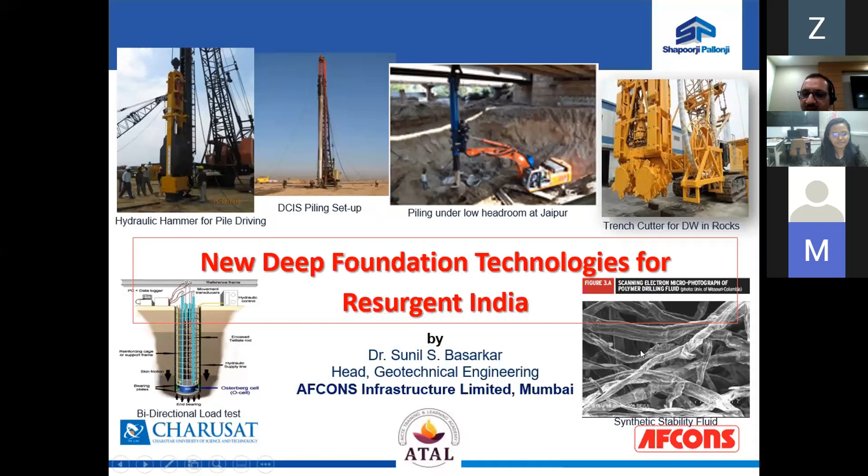My content will go through driven piles with a case study at Dahej, driven cast-in-situ piles with a case study at Mundra. Then what are the recent technologies which have entered the Indian market, and what are the technologies required for making India a vibrant infrastructural hub across the globe. What are the load tests that can address the fast-growing needs of Indian deep foundation industry? Then we conducted an initiative at Hissar, which was about a continuous flight auger pile. This we had taken up just to understand the need for faster piling requirements. I'll take this up, followed by my concluding remarks.

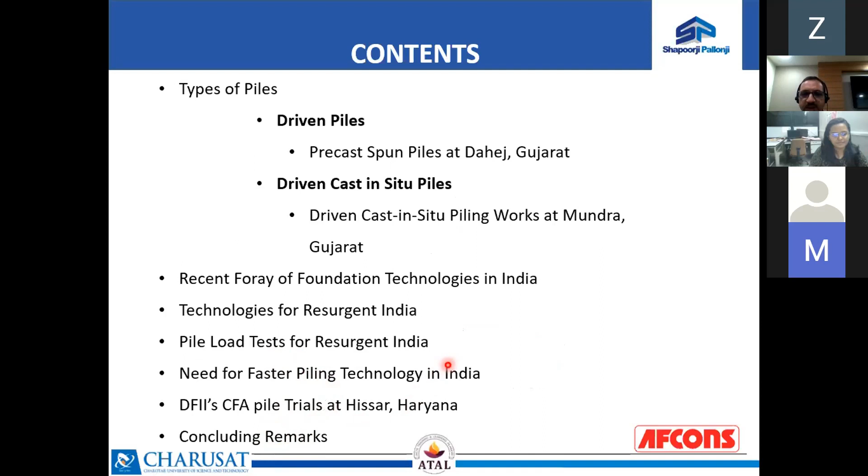If you are aware, there are bored cast-in-situ type piles which are used to take up heavy load. Is my voice audible to all? Am I audible to all? Yes sir, you are clearly audible. Thank you very much.

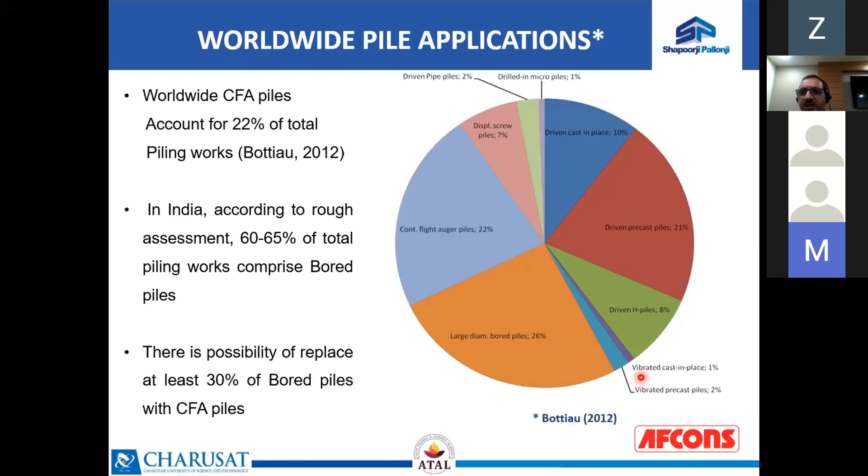I take it to the driven pile, which may be driven by a hammer or vibration or by jetting, water jetting. Driven piles may be driven precast piles, and the actual element may be hollow. It may be tubular, in the form of spun piles, or it may be a steel pipe type of pile, or it may be solid. If solid, it can be circular, rectangular or hexagonal concrete piles. It can be rolled steel members, or even timber piles can also be used.

Timber piles are more popular abroad than in India, because in India we cannot afford the wood as it is a scarce material. There is also driven cast in situ pile, which means you drive it as well as cast it in situ, which is invariably of concrete variety. We'll see what this type of pile is.

This is driven precast piles, in which the RCC element is driven by a hammer or other convenient means. Here you have a pre-stressed concrete pile, a thick-walled pile, but hollow in nature. To drive these piles, we require a type of hammer. It can be any type - hydraulic hammer, pneumatic impact hammer, single-acting or double-acting hammer.

Here you can see a solid RCC circular pile being cast, and then here it is being cured. Because transport of piles is not always very easy, we have segments about 12 to 15 meters long, so that trailers can accommodate and transport these piles conveniently. That makes it mandatory that if you have a pile greater than 12 to 15 meters, they will have to be jointed together. So jointing of segments - the bottom driven segment and the top segment to be driven - is done in situ. It's called a splicing arrangement.

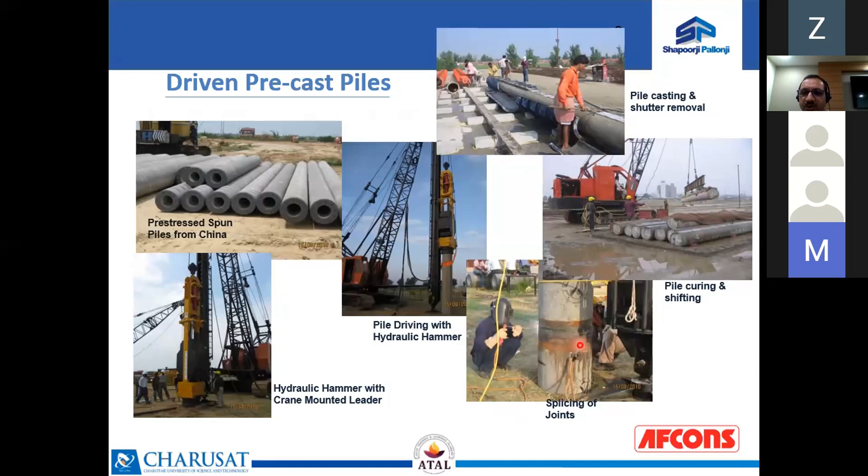So the driven piles, they actually come in lengths, so wastages are very much possible, but being of good quality, the control of quality of concrete is very nice. As I said, at 12 to 15 meter lengths, they will have to be jointed together. Typical section is about 400 to 500 mm in diameter or diagonal. Even 600 mm diameter piles have been possible to drive. Abroad, in Thailand, Malaysia, or Indonesia, if it's soft soil, even 1,000 mm diameter has also been used for driving. So the longer the pile, the more you require a jointed panel.

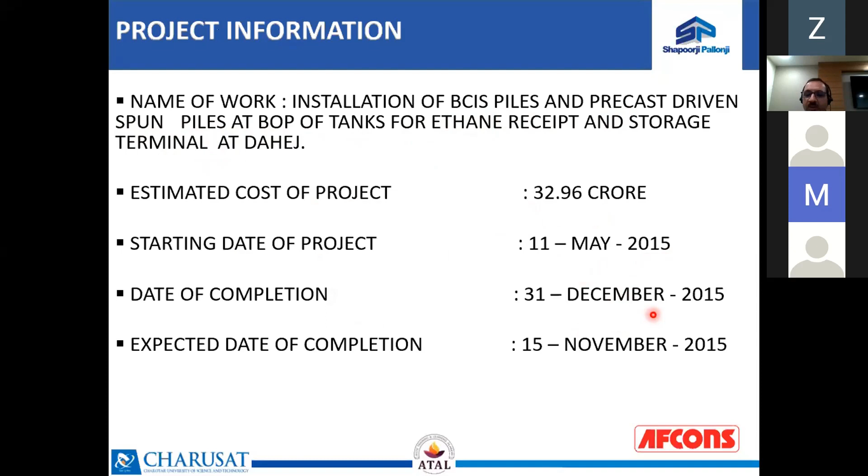With this, I take you to one of the interesting case studies at Dahej, Gujarat, where we had driven the spun precast piles. This was during my tenure at ITD Cementation, an infrastructural company based in Mumbai. This project comprised installation of bored cast in situ piles as well as precast driven piles, spun in nature, for an ethane receipt and storage terminal at Dahej. This was about a 33 crore project which started in May 2015 and was completed in just about 7 months in the same year.

So driven precast pile...

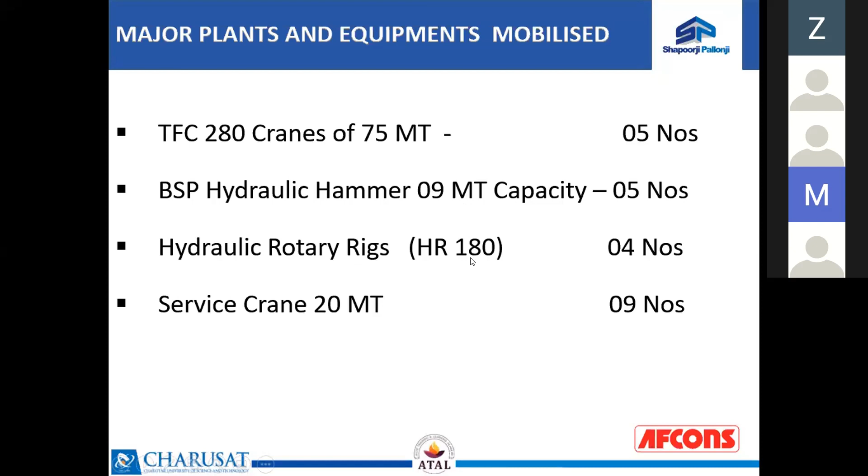So over here, the precast piles have a lot of advantages: rapid speed, a lot of piles can be done in a single day, the quality of such piles is excellent, there's good control, and it is environmentally friendly because the site location is very clean and housekeeping is absolutely perfect in those areas.

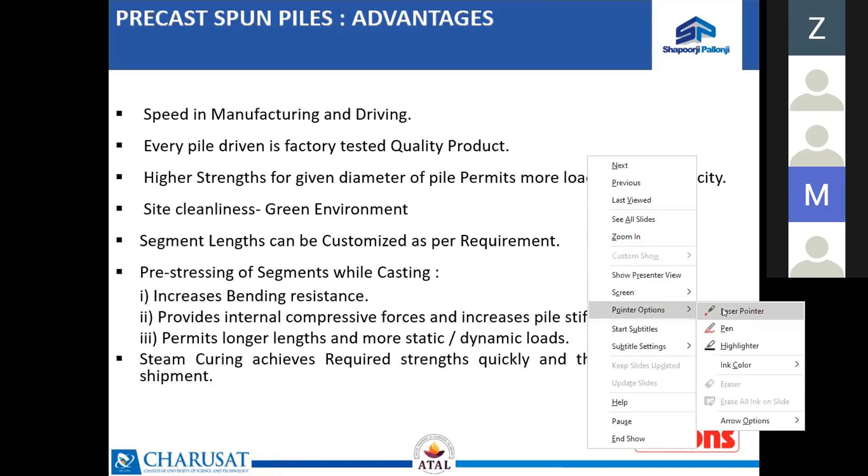If pre-stressed segments are used, it increases the bending resistance. That is the advantage of having a pre-stressed spun pile, meaning for a given area, this pile permits more load to be taken up. So for the same cross section or material, it has more pile capacity, making it all the more economical to use. It provides internal compressive forces and increase in pile stiffness compared to its counterpart, the bored pile. So we can have a longer length of pile and it takes larger load.

There is a possibility that we can steam cure such spun piles, and it can be done in the factory and transported to the sites by trailer. In India, there are about 2 to 3 such manufacturing units available that can manufacture the spun piles in their factory and transport to the site locations.

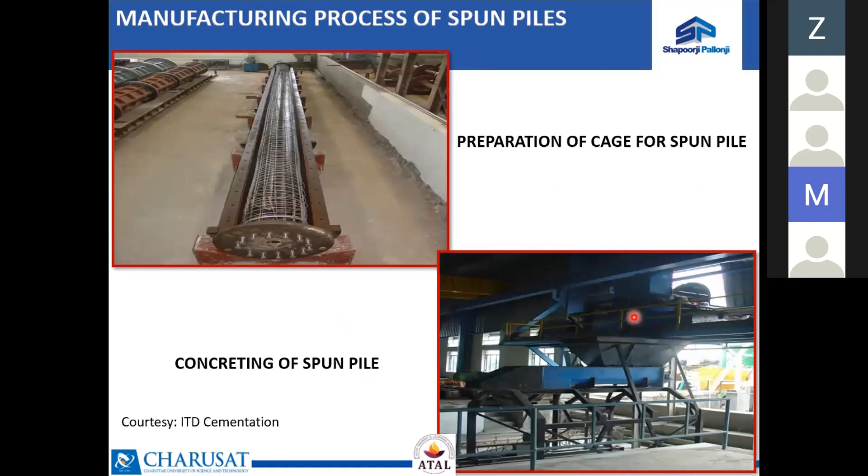Over here, this is the cast containing the spun pile rebar cage. There is jacking at both ends, and this arrangement allows the concrete to be passed from the RMC and poured into this mold by a hopper arrangement. On one side, we have a jacking arrangement so that pre-stressing can be done for the segments. To ensure the concrete is uniform all throughout, we rotate this mold in a spinning action, imparting continuous RPM to ensure concrete is applied and the reinforcement is surrounded by concrete all throughout.

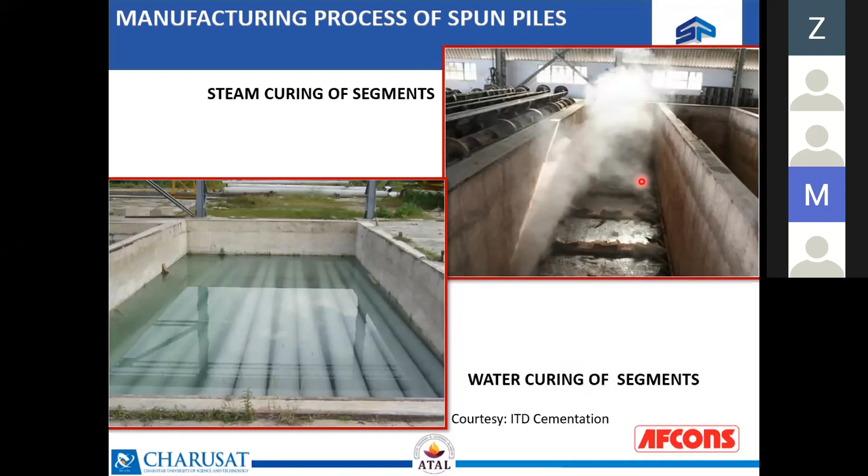Curing of the segments can be either by steam curing in the form of autoclaves, or it can be done in water curing tanks. Both are combined together because steam curing has limited capacity, and establishment for steam curing requires a large number of space and investment. So parallelly, some segments can also be water cured for about 28 days. Steam curing, for your information, is very fast curing, and within 7 days we are able to get the desired compressive strength of the concrete.

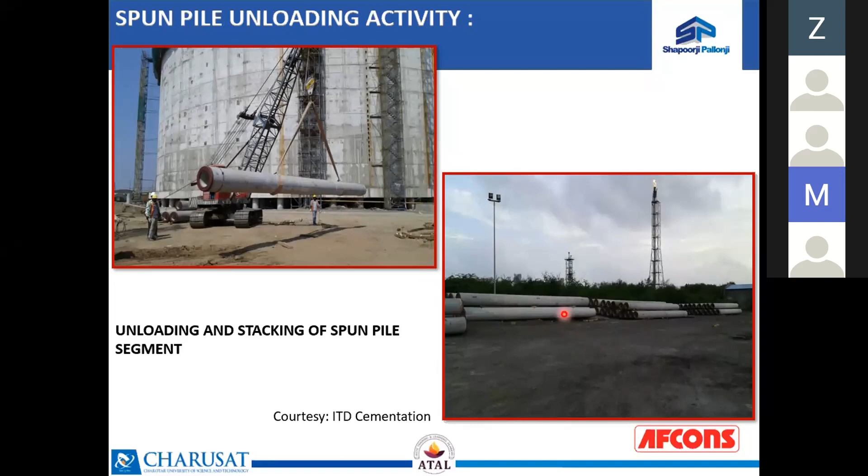This is our activity we carried out at the site at Dahej. You can see the spun concrete pile being lifted up. This is a 12-meter segment being lifted up, and then it is stacked together at one of the designated spots at the site. It is then lifted up, aligned, and pitched at the designated location.

So over here, we had carried out one CAPWAP analysis to study the drivability analysis, just to see what the capacity of the pile is immediately after driving. Then the same pile was subjected to the same test, the drivability analysis, after about 14 days or so, just to check the improvement in pile capacity.

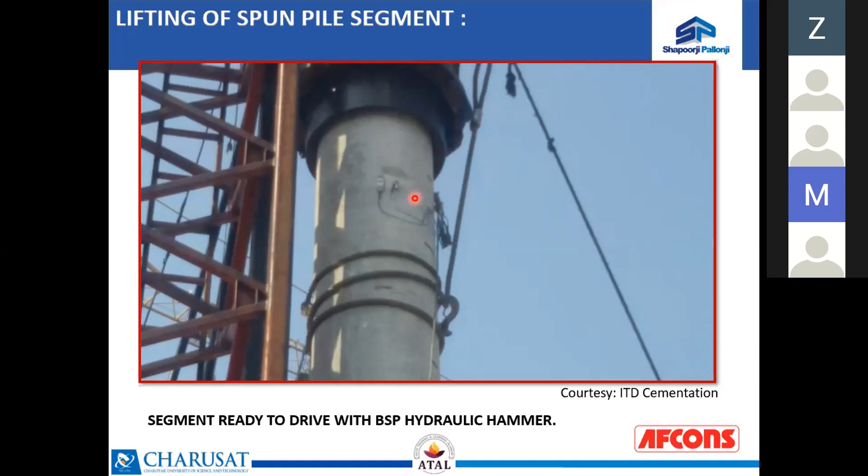So over here, this is a pile that is being driven, and you can see the pile length being driven, and slowly the height of the pile above the ground is reducing. So these are some of the setup you can see associated with pile driving.

Namely, you will see you have a hammer. We had deployed, as I said, an 8-ton metric ton hydraulic hammer, pitched across the top of these precast piles. Over here, you can see a pile helmet, and there is also a wooden dolly fitted inside the pile helmet, so that shocks or damages to the pile head will be avoided.

Since it was a 24-meter pile, there were 2 segments involved of 12 meters each. They were welded on the spot, and typical time required for welding the 2 segments in situ is about 45 minutes. There was a first round of welding about 3.15 mm thick, and finally 3 rounds of welding which were about 4 mm thick together.

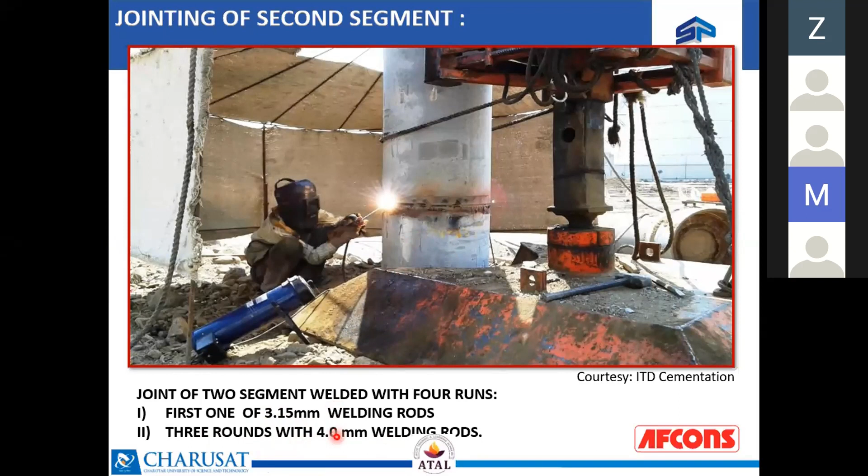So this is a completely driven pile and instrumented now so that we can perform the CAPWAP analysis. This is the test which is immediately after the driving of the pile, and it gives us the resistances in the side shear and the end bearing resistance, so that the static pile capacity of the pile can be determined. Finally, we can also establish the termination criteria and what the increase in pile capacity due to the setup criteria can be.

In this site, you can see that over 2,000 piles were driven, and the pile setup, meaning the capacity immediately after driving versus the capacity after 15 days, was more than 3. That means if we have about 100-ton capacity today immediately after driving, the capacity at the end of 15 to 20 days could be as high as 300 ton. That's the advantage of having a driven pile, which means capacity increases with time.

So this is a typical arrangement. We had a 4-pile group with a cap. You can see how we can extend these bars. What we do is provide a plate at a development length inside the spun pile, and on the plate we keep these extension bars.

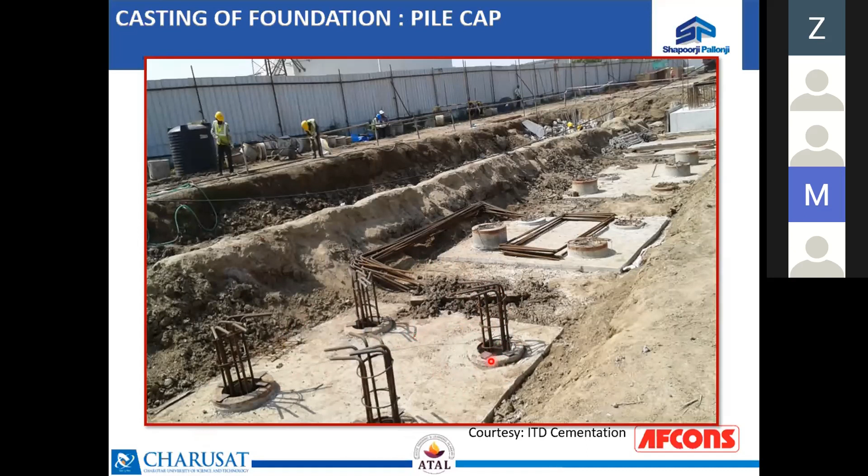These are the bars that will go into the pile cap. That way we ensure that the load from the superstructure will be transferred to the pile cap, and then it will be taken up by the spun piles. So this is an interesting mechanism that ensures the loads are transferred to the spun piles.

There is another variety of pile called driven cast-in-situ piles, where there is a steel casing with a bottom shoe, and this casing is driven by hammers. Imagine a closed bottom pipe driven by the hammer, and once it is fully driven, the hollow portion is fitted with the cage, and the hollow portion is now concreted.

Then this casing is now withdrawn. Casing is a costly material, about 2 lakhs each. So it is important that we extract the casing fully, and the pile will now be in position to be in contact with the soil around, giving it very high side shear resistance and end bearing.

So this is a typical arrangement we have for driven cast-in-situ piles: closed end tube driving, concreting, and reinforcement. Over here, this is a steel casing of a single length; no jointing is done during driving. These are the pile shoes, the flat bottom shoes used during the driving operations.

The casing along with the rig, you can see they are ready. At the top, above the casing, there is a hammer. As soon as the casing is pitched, there is a verticality check to ensure that the pile will be vertical. The initial verticality check is the most important aspect in the driven cast-in-situ pile.

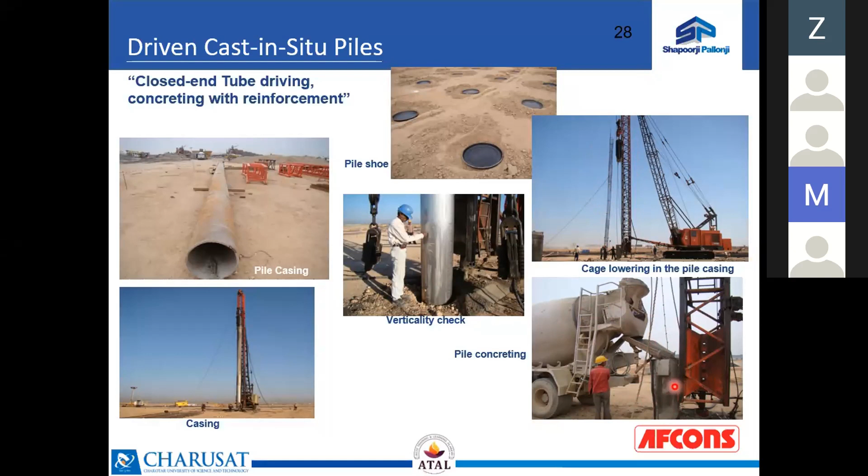I take it to a very interesting case study in which we performed the driven cast-in-situ pile at Mundra in Gujarat. Mundra is a port town, an industrial town, located on the western shores of Gujarat. We performed this kind of pile during 2008 and 2009, when Mundra was just a developing town.

Nothing was there. Most of the available tools and equipment for any repairs were available at least about 100 to 150 kilometers away. So the logistics was a big challenge at this site.

So we had installed, driven 560 mm diameter piles, and 66-meter RCC rafts were actually supported by the driven cast-in-situ piles. The scope of the project was very huge; sand filling and earth filling together were about 110,000 meter cube.

Then there was a driven cast in situ pile of 560 mm diameter. They were 8,821 in numbers. Probably this is the world record in a single project where this quantum of piles were used.

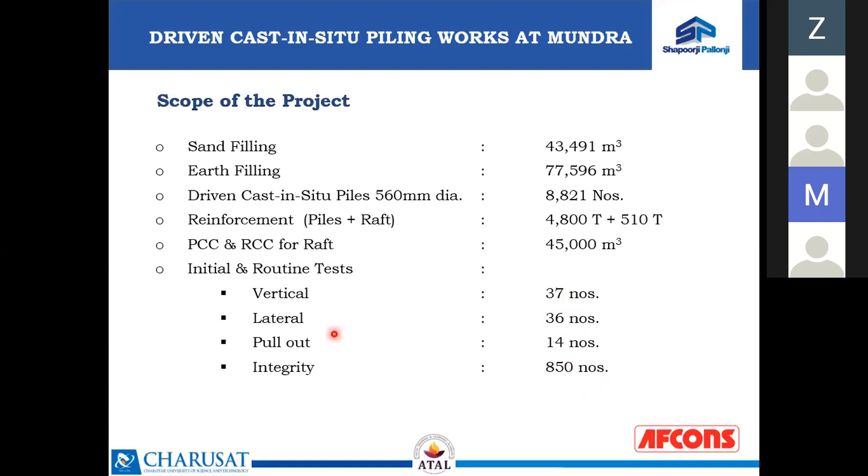Number of load tests were conducted. You are familiar with the plate load test, but pile load test is another heavy duty test. We have performed 37, 36, 14, and 850 integrity tests, which includes vertical, lateral, and pull-out capacity of the pile.

Overall, this is the strata we had at Mundra. Typically they were silty sand, highly compressible clay, sand. In fact it was almost soft soil up to about 10 to 12 meters. SPT-N typically varied from 12 to 19 for the top material, and then we terminated our piles at about 17-meter depth at an SPT of about 36.

You have to know that pile driving subsequently densifies the soil. That means the effort for the first pile will be less than the effort for the 10th, or 100th, or 500th pile driven thereafter.

This project was about 6 months. It included mobilization, installation of the piles, including the tests. So it was a big challenge for the project because there was a huge resource requirement.

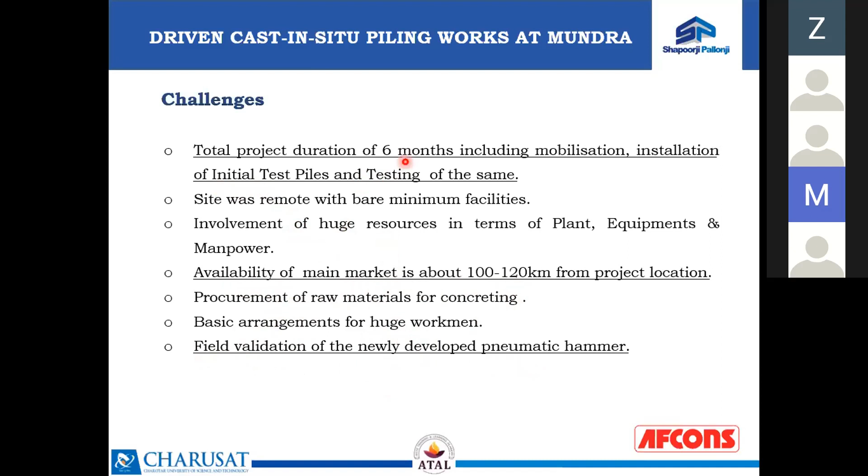All the main markets were about 100 to 120 kilometers from the project site. All the equipment was new, particularly the newly fabricated pneumatic hammer, which was to be validated during this project time. The time was essential and very short, 6 months, for a kind of piling work which had never been observed across the globe. What could have been the execution strategy to meet this kind of challenge?

We had mobilized about 2 rigs and a mobile plant within 2 weeks on an urgent basis. Finally we mobilized 3 additional rigs and units of the hammer to take care of the peak requirement of progress. There was a mechanical team with complete inventory of spares, adequate lighting and workforce. There was a standby plant, as the nearest available workshop was 120 kilometers away.

There was a time motion study we performed for each pile, meaning what time is required for each activity of the pile, because essentially the pile was to be done within 30 minutes. Skilled manpower were selected within Gujarat state, and an advanced program for the work with the client and issuance of drawings was met to keep the schedule on time.

What are the features of the strategy? We developed our own hammers indigenously. There was a 5.4 ton ram weight hammer we used. The drop of this hammer was 1.2 meters. It was crawler mounted, with a yield of about 36 to 38 blows per minute, quite fast.

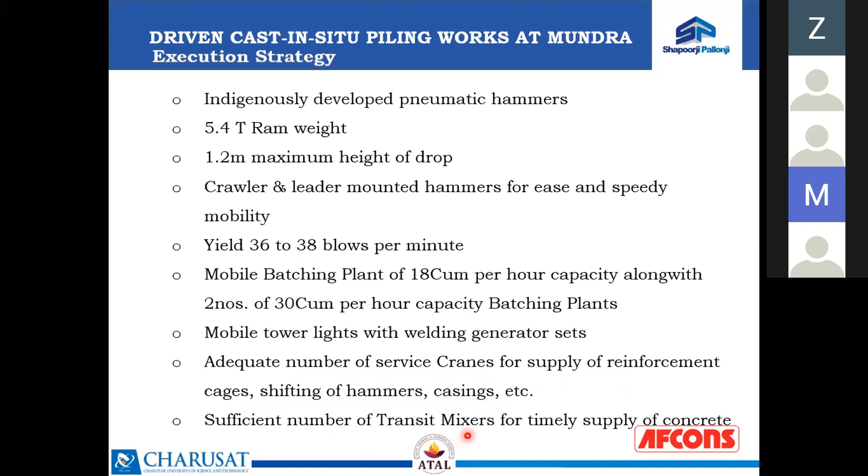There were an adequate number of service cranes with spares. Supply of reinforcement cages were ready, and shifting of hammers, casing, etc. were fluent. There were sufficient transit mixers kept handy to supply the concrete.

So our first pile started 47 days from the letter of intent. We carried out several improvements to ensure that the progress time per pile was increased. Cycle time was reduced to an average of 45 minutes per pile, which is an unimaginable thing. Even some of the fastest piles were delivered in 20 minutes at this site.

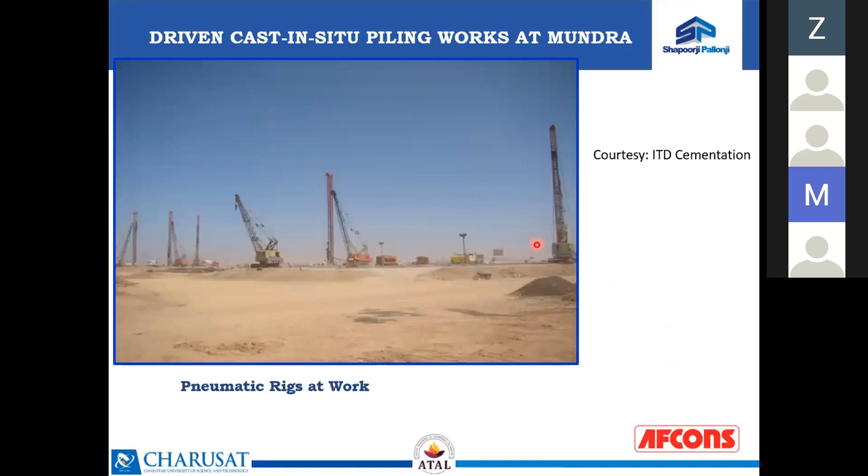So over here you can see pneumatic rigs in operation at the site. This is a typical rig we have at the site, with the cages kept ready so that as soon as the driving operation of the casing is done, the cage can be lifted up and inserted into the casing.

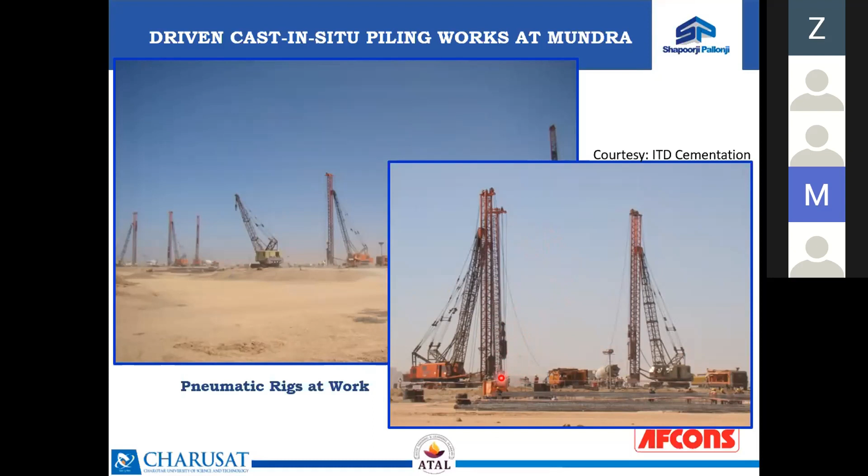Once the driving and concreting is done, you excavate some of the portion of these locations so the exposed piles can be seen. You will find that this is a very neat site, with no disturbance, no untidy areas. It's absolutely a clean site, which makes this driven cast-in-situ pile one of the most preferred piles, provided the technology is available with the contractor.

Since the rebar cage from the pile has to be connected to the pile cap, this portion of the pile has to be chipped out. There are chipping equipments which can be used either manually, with a jackhammer to break these piles, or mechanical and automatic chipping machines are available.

Finally, after the chipping, you find that these rebar reinforcements are exposed. They'll be shortly cleaned and then ready for inserting into the raft for the circular tank. Over here you can see that throughout this circular raft, a whole network of piles are there.

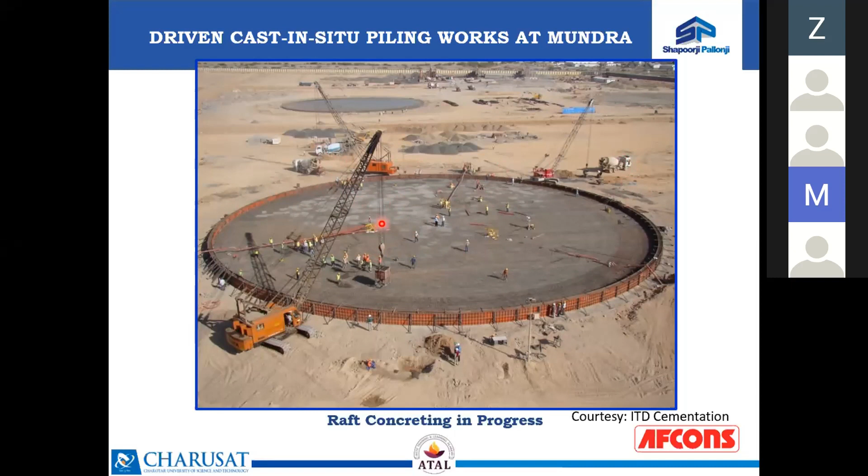These pile reinforcements are straightened up, followed by the reinforcement cage for the raft. This itself was a Herculean task because a 66-meter diameter raft was to be entirely fabricated with the reinforcement cage and then concreted together. Now the arrangement and commencement of concreting is in order. You can see the mixers, and parallelly couple of units where concreting operations are taking place simultaneously. A very unique site and full of achievements.

A project where we take pride in listing our achievements. Maximum number of piles installed in one day was 211, which is a record of sorts.

The maximum number of piles installed by a single rig per day was 40. 100 piles were installed per day for more than 44 times, which means on 44 days we had observed our pile count exceeding 100 piles per day.

The maximum piles per week we completed was 1042, which means close to about 150 piles completed in a single day of that week. The maximum piles installed in a month was 3,301. This is a record of sorts because many projects themselves have a total pile count of only 3,301.

If you recall the spun piling at Dahej, you'll observe that the total number of spun piles used there was 2,000. Imagine precast driven piles, driven cast-in-situ piles, about 3,301 in a single month driven.

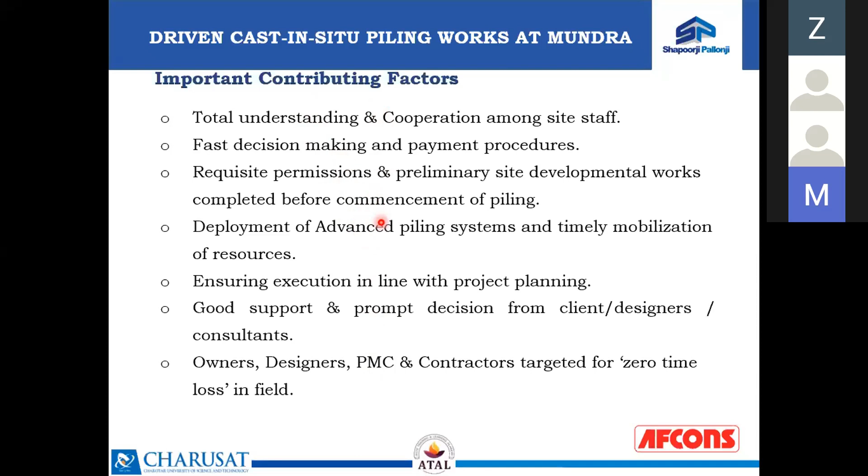Now, having discussed the two technologies of driven piles, I'll move to the recent developments in foundations in India. Earlier, piling technique used a chisel and baler method, in which a heavy hammer was lifted up and dropped at a certain point. This was common practice till the 1990s. It was very slow and catered only to bored piles.

Some new concepts have been introduced in the recent two and a half decades. As I said, the driven pre-stressed concrete spun pile was initiated in 2005 onwards, and it is now very commonly adopted in Indian sites.

Then there is a trench cutting machine used for diaphragm wall construction in weathered rock. This trench cutting machine can be operated mechanically or hydraulically, and it enables very rapid diaphragm wall construction, particularly in weathered rock. Earlier, till 10 years before, we used to do diaphragm wall only in silty or clay soil using the normal grab method. But with growing demand and challenges, diaphragm walling or retaining walls in weathered and strong rock were also demanded. So with this, the technology and equipment advanced, and we are now in a position to do diaphragm walls in weathered rock as well.

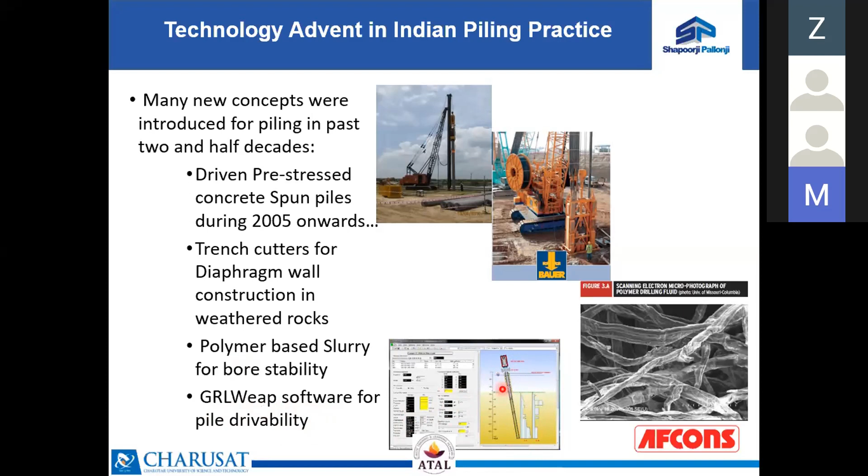A lot of advancement in software for pile analysis has taken place - we have APile, we have LPile, we have GRLWEAP, and we have group pile analysis, which can give us precisely what the pile capacity can be and what the group capacity of the piles can be.

FHWA, that is Federal Highway Administration, is a US-based agency. It speaks of future readiness. The infrastructure requirement is increasing day after day, which means we also have to take up the challenges of technology requirements.

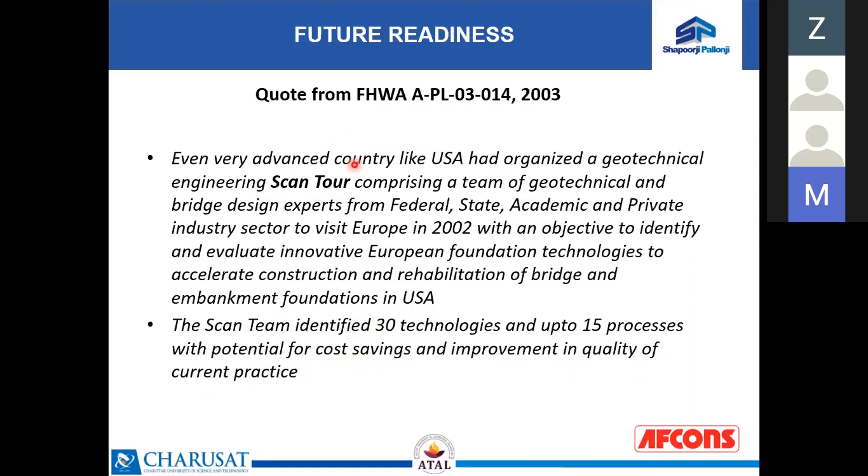India can also have a scan tour of what technologies can be adopted in India. The US identified 30 technologies and up to 15 processes that can result in cost saving and improvement of quality of current practice. Taking inspiration from countries like the USA, we can think of what technologies can be adopted for a resurgent India.

We can have embankments supported on columns, meaning rigid inclusion or controlled modulus columns. This is a method where we have several non-reinforced piles in a plan area, and these piles can be capped with a padding layer of about 1 meter thick, so that loads like spread footings, tankages, and containers can be supported by embankments which are supported on the columns. We have used this technique, controlled modulus columns, in one of our projects in Africa.

In India, one such project was carried out about 8 years back at Ranchi. At that time Menard India was there and they had executed that project.

Stone column is a technology, but encasing the stone column with a geotextile material reduces the lateral spread of the stone columns. This technology needs to be adopted in India.

Rapid impact compaction is adopted by some agencies, but not as a regular practice, which needs to be encouraged, so that any fill material or loose material can be compacted by rapid impact compaction. We are going to adopt this method for one of our projects at Kochi, and within 6 months we are going to use this technology.

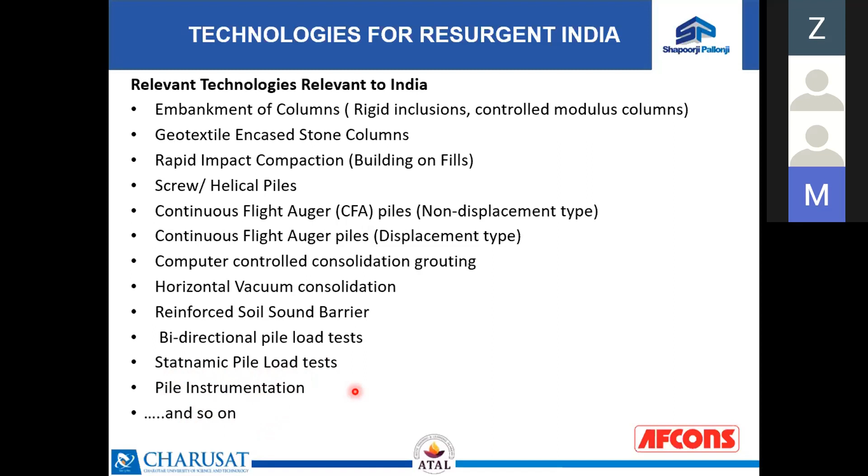Pile instrumentation of various kinds are equally important, and they give us insight into pile behavior. They are already used, and instruments of various kinds are available, and being small, they can easily be imported into India without much cost. The list goes on, but there is a requirement that this kind of technology should soon start coming into India.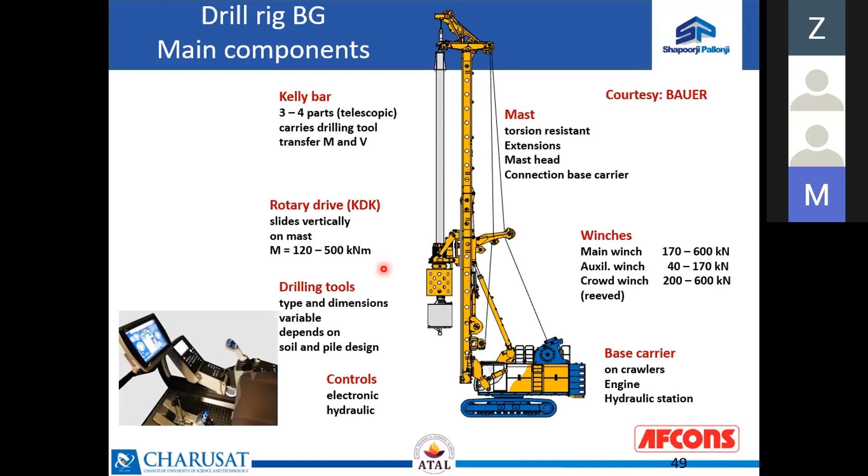There are cables and winches used for performing the drilling and boring operations. The rig has a control unit, so an operator can sit peacefully inside the cabin and monitor the progress automatically through the available panel. This kind of rig is called an integrated rig, an advancement that can assist us in achieving good piling quality in bored piling.

We can now negotiate the toughest of rock, meaning even rock as hard as about 1000 kg per centimeter square UCS can be broken up and cored by a Kelly drilling machine. Various kinds of tools are available.

These are the soil auger, the rock auger, and this is also a kind of rock auger which can have a conical bottom. This is a complete cross-section rock auger, and this is also an auger specialized with bits, where even the angle of the bit and the bit material are of very heavy duty and durable material.

In order to have a very fast method of coring, we use a core barrel. This is a rock core barrel, which enables us to get rock cores from the piling method.

There are roller bit core barrels also, which can core at the periphery as well as at the center, and they enable a very fast progress of the piles. Imagine the complete core can be recovered during the piling. Cores can be housed and stored, and they can be even sampled. We can do the drilling work and determine the properties of the rock collected during the piling. So you can see this core barrel has collected the rock core, and it will be removed and pushed and stored, and further drilling operation will be carried out.

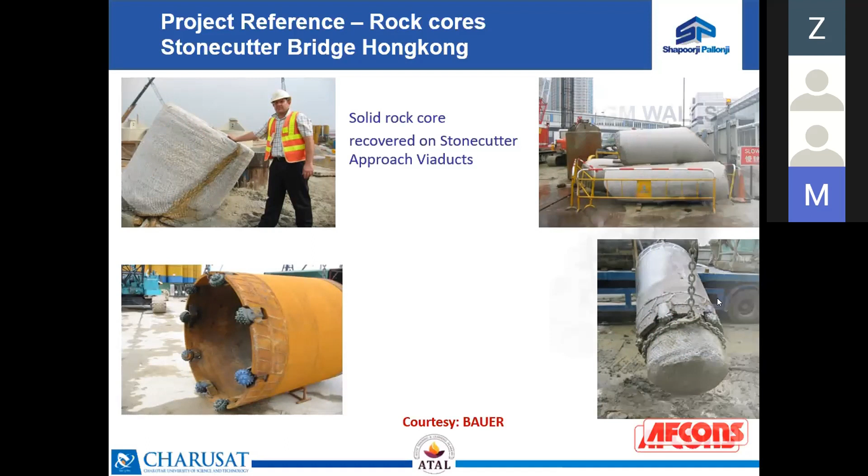I take you to the next venture of the technology into the resurgent India. I talk of a deep diaphragm wall technology. Diaphragm wall is nothing but a deep retaining wall.

I have been really privileged to be associated with the Sabarmati Riverfront project at Ahmedabad, where we had executed 13.5 kilometers of diaphragm wall on both sides, both banks of the Sabarmati River. Sabarmati River represents a trend-setting project, and soon other riverfront projects will be based in line of the model we had prepared for the Sabarmati Riverfront.

Now, what is this diaphragm wall? Diaphragm wall is a continuous retaining structure. It is cast in situ in trench excavation, also called a slurry trench wall. It can be used and applied for shafts, tunnels, and basements.

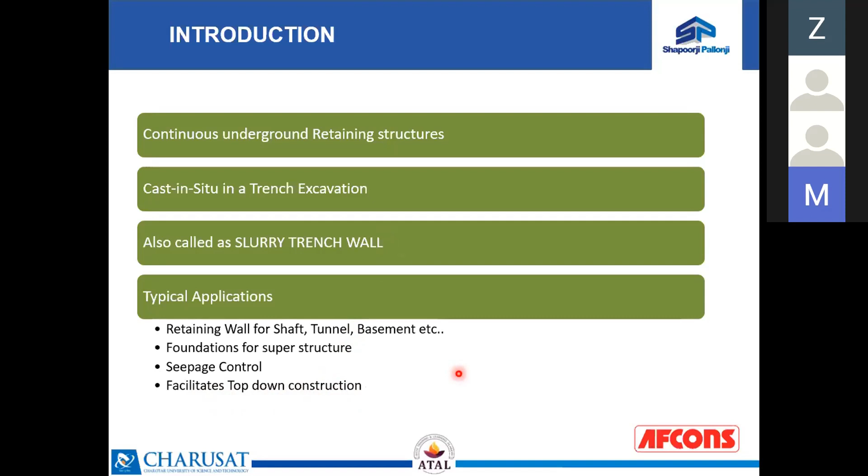It facilitates top-down construction. Remember, Ahmedabad is now a hub of activity where a lot of diaphragm wall construction is in progress. So top-down construction is one of the faster technologies for commercial and metro station buildings, and one of the key components for top-down construction is the diaphragm wall. This means that to facilitate top-down construction, expertise in diaphragm wall shall be essential.

So diaphragm wall thickness can vary from 600 to 1200 mm. Panel width, they are constructed in panels, can vary from 2.5 to 6 meters. Each panel can be a linear panel, an L-shaped panel, or a T-shaped panel. The depth of panel will vary according to soil condition. 20 to 22 meters is possible and quite normal. Even up to 40 meters depth of the retaining wall, the diaphragm wall, we had executed.

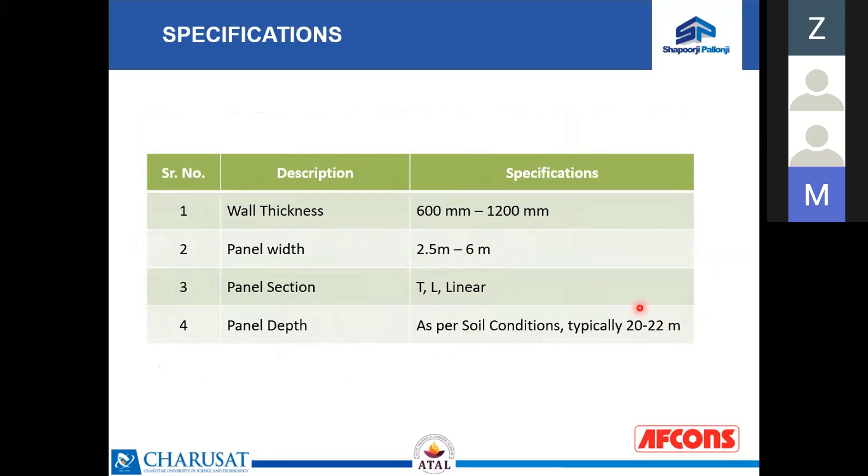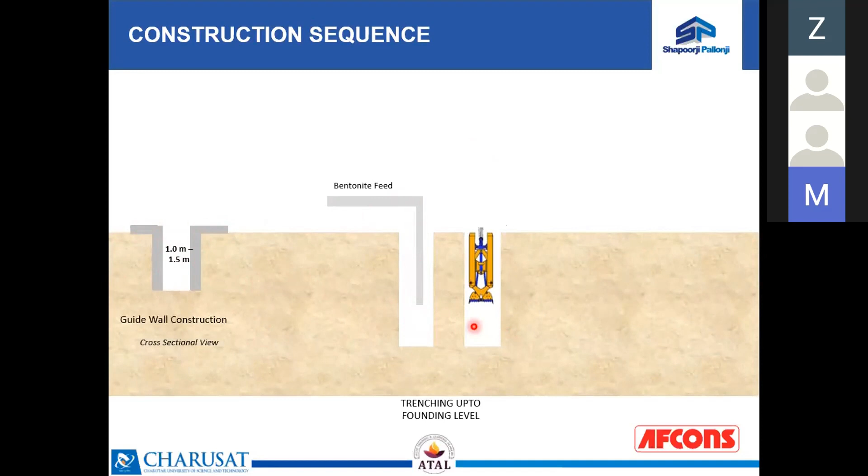How do we execute the diaphragm wall? Let us see. We have a ground over here. We are going to construct a small guide wall, which is a RCC guide wall, about 1 to 1.5 meters deep. We are going to put the bentonite or any polymer slurry inside the trench so that stability is provided. And then we start the trenching operations by using a mechanical or a hydraulic grab.

So once the trenching is done, a complete panel will be completed. You can understand the slot can be about one-third of the width of the diaphragm wall. We'll be doing one cutting over here, one cutting on either side, and then the remaining part at the center.

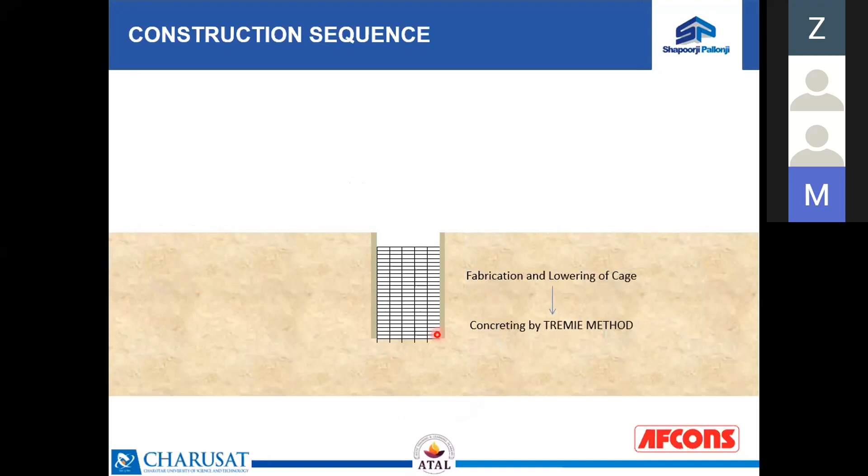We need to provide a vertical support also. For that, after the boring, after the trenching, we have a stop end at either side. So once the stop end is introduced, we will be inserting the cage inside the trench. The cage will be inserted and all the cleaning operations of the diaphragm wall will also be taking place. This will be followed by inserting the tremie on one side, inserting tremie on the other side.

Remember, tremie is a concreting procedure for wet environment. That means if you have underwater and still want to do concrete, you will be doing concrete by tremie operations. So tremie is nothing but a 250 mm diameter pipe with a hopper at the top, and concrete flows from bottom and comes to the top. Then this is followed by concreting from bottom to top. After completion of the concreting, your diaphragm wall panel is now complete.

So you have the first panel, which we call a primary panel. Other panels which don't have any panels on the side are also called primary panels. If there is a panel on the left or right side, the panel you are going to execute will be the secondary or running panel. Finally, when all the panels are completed and only one panel remains, this panel is called the closing or final panel. Together, these form a continuous retaining wall called a diaphragm wall.

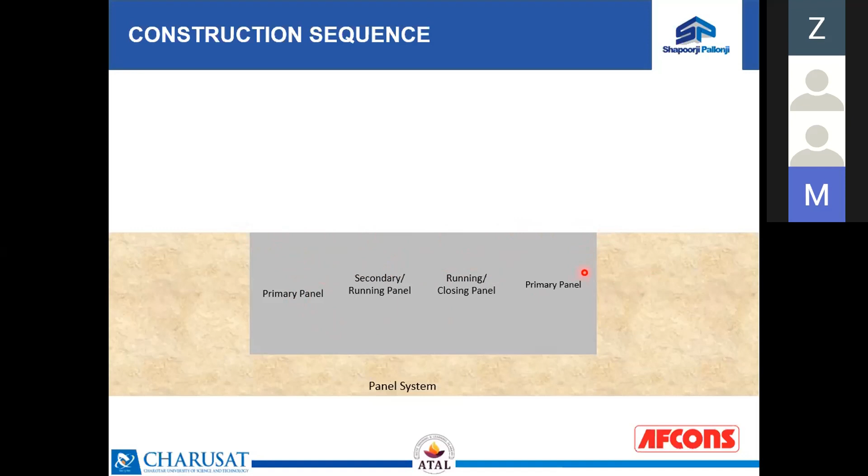Remember, when we do the concreting and execute the diaphragm wall, nothing is visible to us. That means we are constructing completely blind. All the qualities will be exposed only when we start excavating inside the surface of the diaphragm wall.

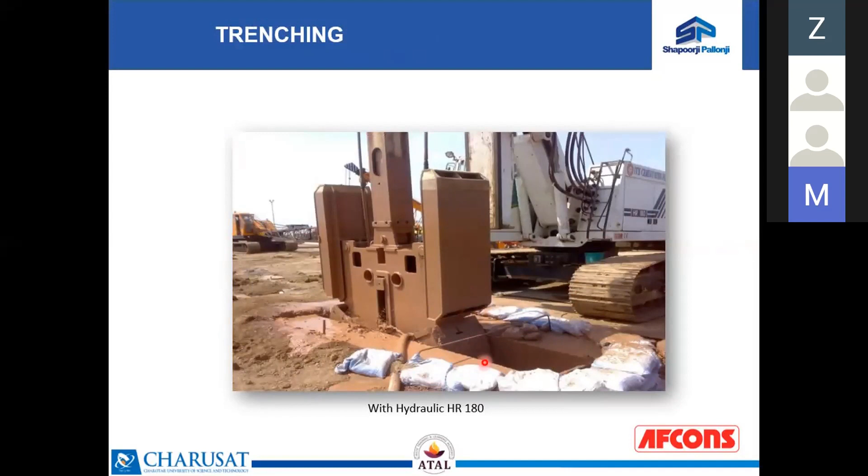Let's see the construction. This is a guide wall excavation, and the guide wall concreting is in progress. You can see that this is a T panel, it has the shape of a T. This is the trenching of the diaphragm wall, and you can see the guide wall very clearly.

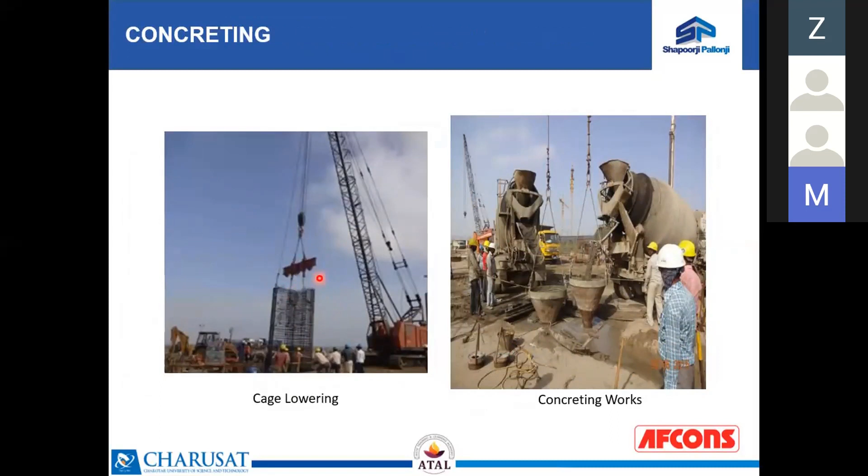You are preparing and fabricating the cage. The cage is being lifted up, then lowered. You can see this is a T form of cage, that is, a T panel. There are two tremies used to concrete the panel.

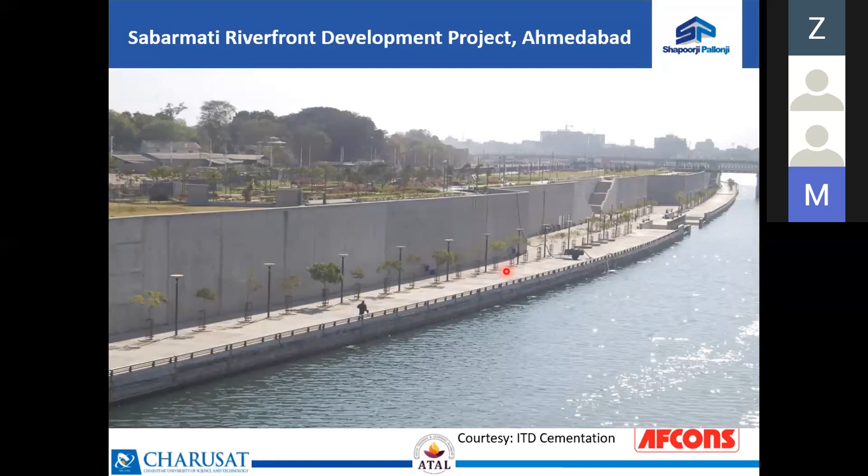Over here, we take you to the beautiful journey of Sabarmati riverfront. This is the final product which you see, and almost 100% of you have visited and enjoyed this particular recreation site. What was the aim of this project?

The aim was appropriate development of the riverfront, turning the river into a major asset that can improve the quality of environment and life of the city, as well as improve infrastructure efficiency. It was also meant to promote tourism, eliminate flood hazard, provide informal markets, recharge groundwater aquifer, and beautify the city with city-level recreation spaces and rehabilitation and resettlement for slum dwellers.

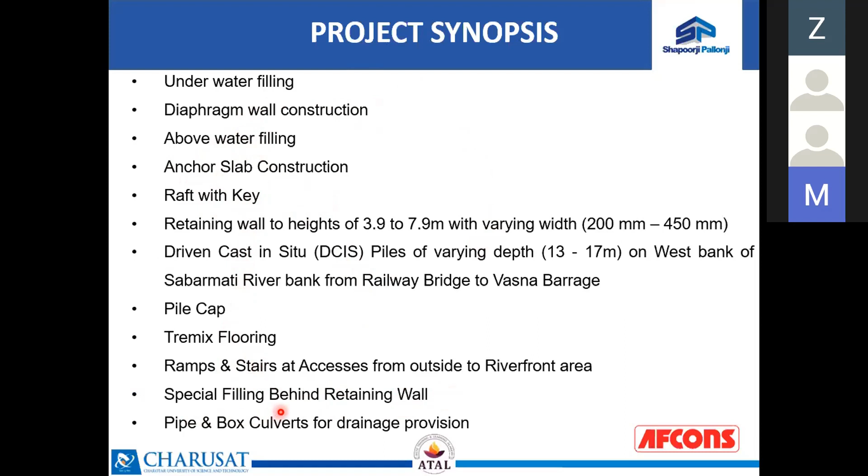One portion was earmarked for slum development. There were a lot of activities part of this project: underwater filling, diaphragm wall construction, above water filling, anchor slab construction, raft construction, retaining wall construction, some driven cast-in-situ piles, pile caps, Tremix flooring, ramps and stairs for access, and special filling material, pipe and box culverts for drainage provision.

What were the challenges? When we commenced this project, it was the first of its kind in India, so expectations were very high. The scattered site was 13.5 kilometers, including diaphragm wall on both sides. Innovations were required for trenching, with special precautions needed for deep trenching because the sand was loose. Access problems were quite there, and there were problems of flooding during monsoons due to sudden release of dam water.

So, a pictorial tour of this project. Initially, we were supposed to use the same sand dredged from the Sabarmati riverbed. That means we had to provide dredging, pump the dredged material, and then fill it. So dredging of sand and filling of the dredged material were done simultaneously. This is an early view of the project, around 2008-2009.

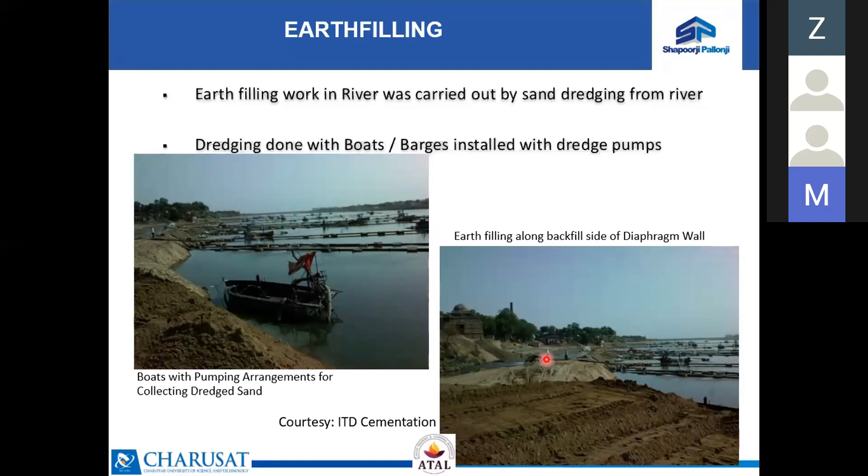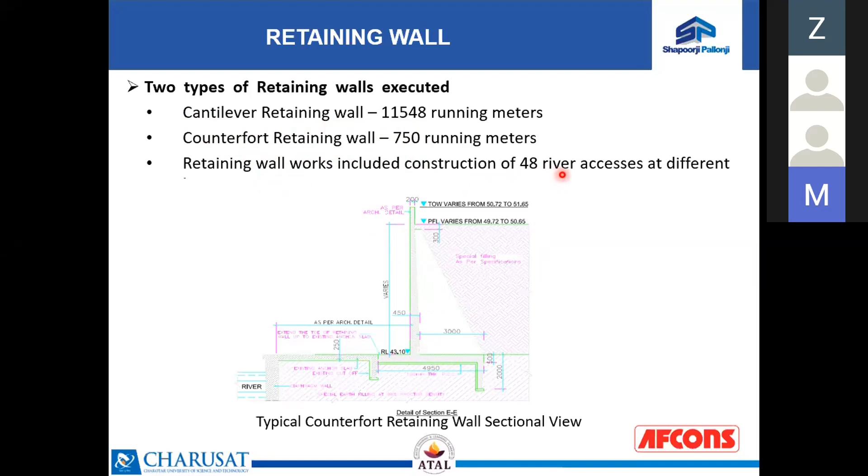This retaining wall varied in types. There were cantilever retaining walls with keys on the backfill side. If the height of the retaining wall was more than 6 meters, we provided a counterfort to increase the bending resistance capacity of the wall. Cantilever retaining walls totaled about 11,548 meters in length, while counterfort retaining walls comprised 750 meters of running length. The retaining wall also included construction of 48 river access points at different locations.

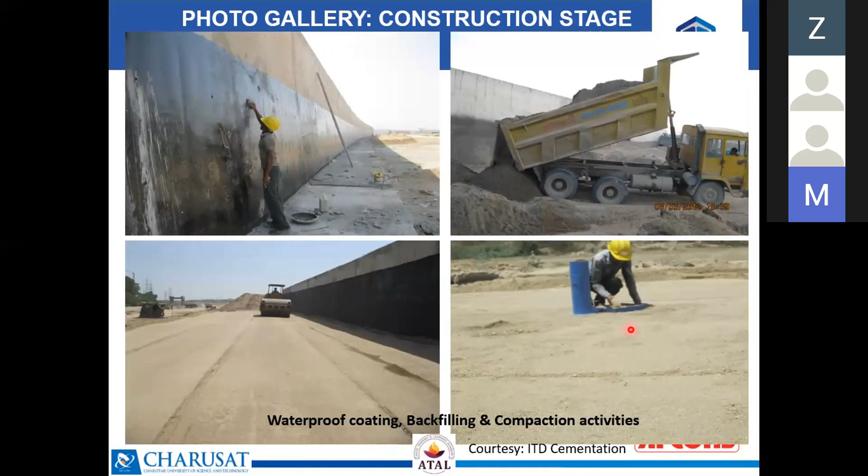Over here, this anchor slab is under construction. We provided the PCC, then a rebar cage, and the RCC concreting was completed. This retaining wall required waterproofing in every way. Once the waterproofing and drying was ensured, backfilling of the retaining wall took place. Once the loose material was placed, we compacted it with a vibratory roller of about 2-ton capacity. This is a familiar test which measures the density of the compacted fill by the sand replacement method.

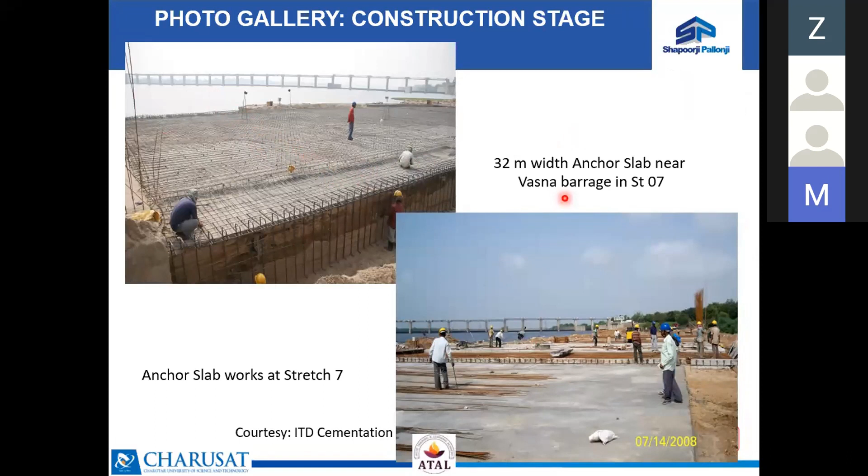You can see the execution of the counterfort retaining wall. At the background, you can see the Sabarmati river. This is the 32-meter wide anchor slab under construction at the Vasna Barrage at stretch number 7.

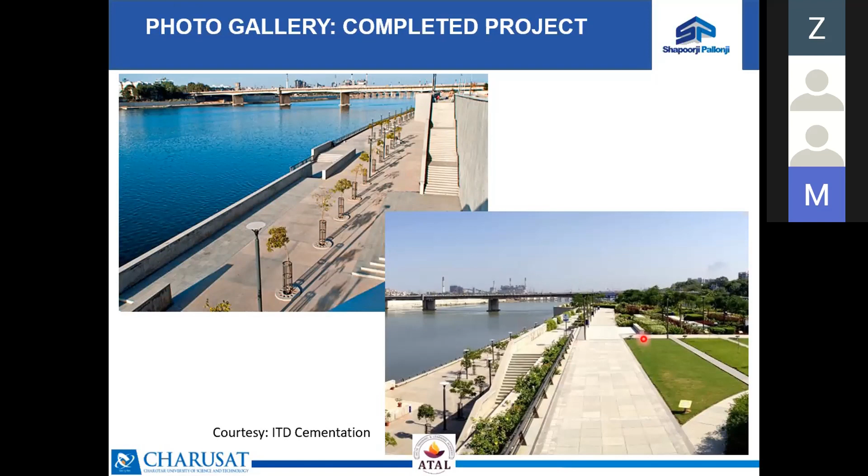So that means all the parks which you see belong to this side, and there is a riverfront gallery you can have to enjoy the serene view of the Sabarmati river, both during daytime as well as during the night. Excellent architecture provided has made this location a tourist destination. A good deal of sprawling gardens have come up, and beautification of this area is very clear.

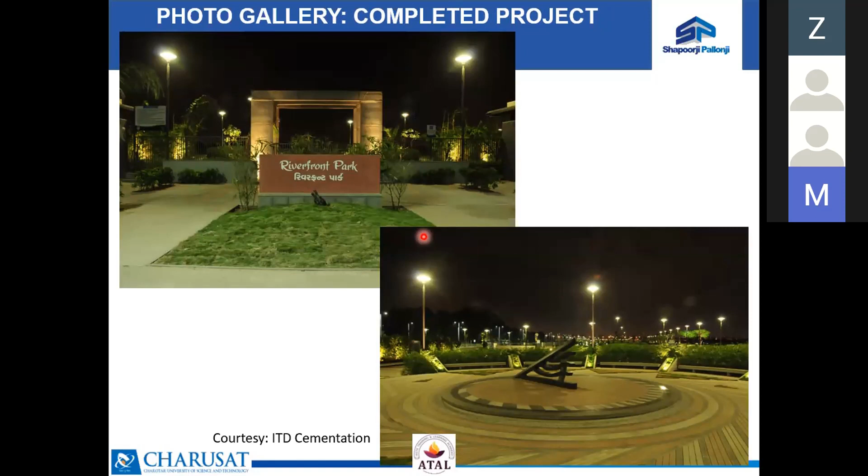Night visit is something which you will all appreciate, a memory to cherish. Definitely one of the prides of our execution and a milestone of my professional career, having spent and delivered some of my professional expertise to this project.

Now, what are the important challenges and achievements? It is a revival of the iconic Sabarmati River as a public sanctuary for the people of Ahmedabad. The ecological transformation of the Sabarmati River and its surrounding areas significantly improved the spatial structure and habitat condition of the river and adjoining areas.

Fresh avenues of city development like public buildings, ghats, cultural and educational institutions, water sport recreation, public parks and plazas have sprouted in and around this riverfront. There is an uninterrupted pedestrian promenade on each side of its 10-kilometer bank.

So this is a project which is now a model for the plans that are on the anvil for developing the Yamuna riverfront and the Ganga riverfront at Varanasi and Delhi. So already the blueprint is on.

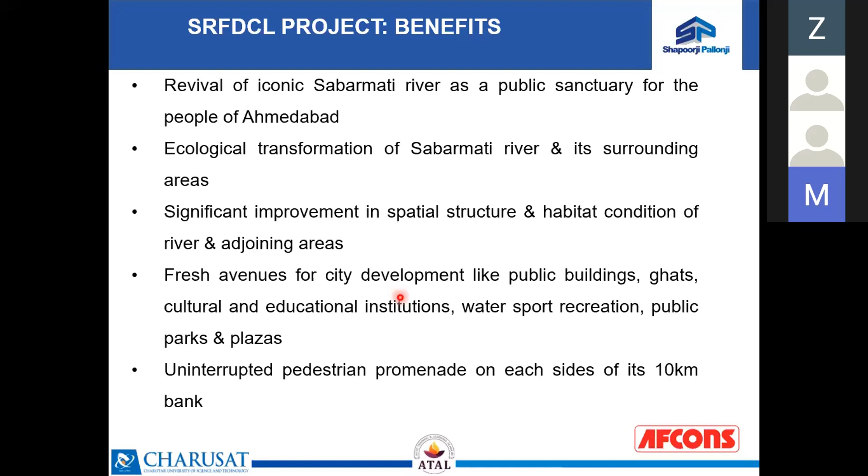Complexities of Himalayan rivers are very high, so the hydraulic modeling and structural modeling is taking its own time. But definitely this Sabarmati riverfront project serves as a model for all the upcoming riverfront projects.

As I told you, we need good technology for performing the pile test, because about two decades back, the maximum capacity of a pile was just about 1,000 tons or so. Nowadays, we go for a very high capacity of piles, to the tune of about 3,000 to even 5,000 metric tons. This is a conventional method of load test, called the Kentledge method.

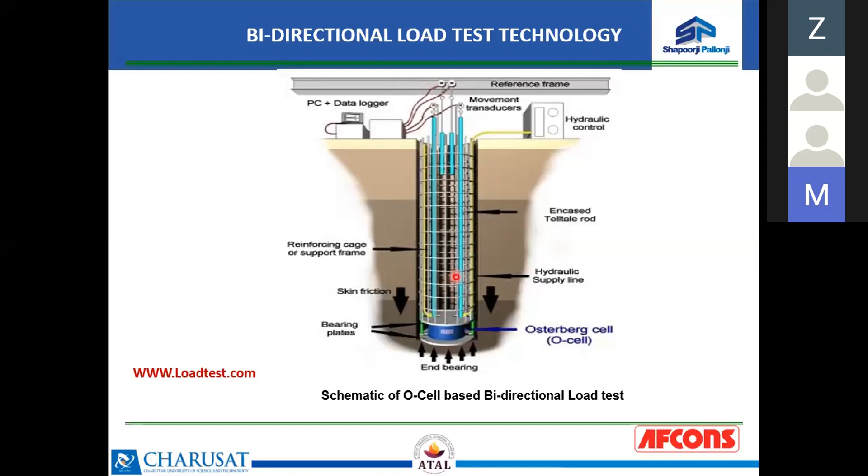This is called the Osterberg cell. This is essentially a bidirectional load test, which can be used to achieve very high test loads. Imagine a normal Kentledge load test is applicable for about 2,000 tons of test load, whereas the Osterberg or bidirectional load test can be used fruitfully up to even 36,000 metric ton, close to about 18 times the normal load that can be carried out by the Kentledge method. This is an examination of the top and bottom movement of the O-cell, which gives us an idea of the mobilization of the shear resistance.

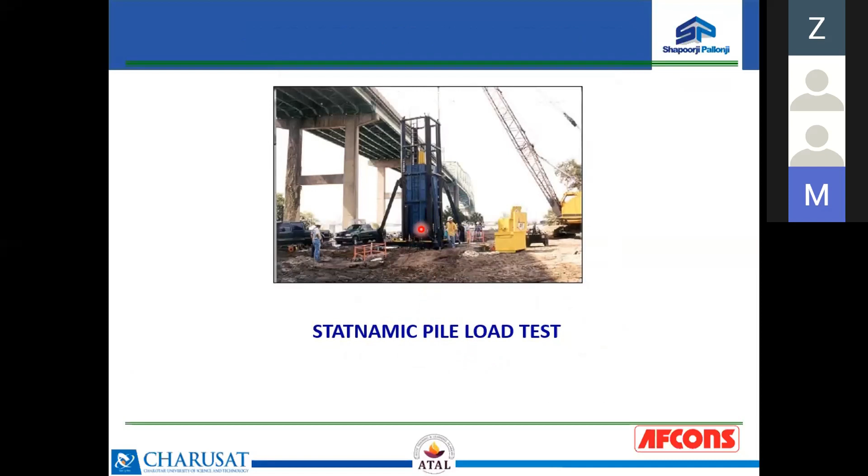Another type of test I need to include is called the Statnamic pile load test, which also has the advantage of being called a rapid pile load test. It can be suitably performed up to a test load of 4,000 metric ton.

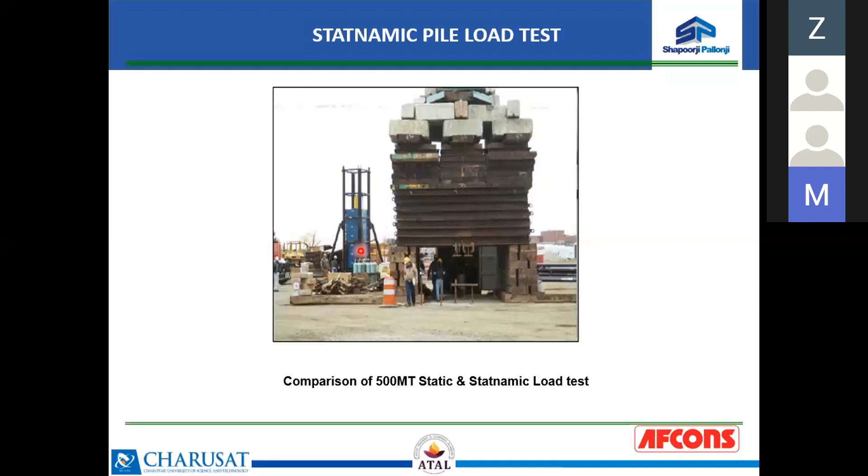This is a very interesting picture that shows a comparison of the static as well as the Statnamic load test. Here you have a conventional static load test - look at the loads that had to be put up for conducting a 500 metric ton load test, whereas a very slim mechanism is what is required for the Statnamic load test. In India, we haven't started the Statnamic load test, but it is very popular in countries like Malaysia, Indonesia, Korea, China, and Japan. Europe and USA also have this technology, but with the onset of the bidirectional test, this technology is slowly getting pushed to the back doors, so it is not as popular as the bidirectional load tests are nowadays.

So what can be the instruments? It can be the load cell, various kinds of LVDTs, strain gauges, sister bars, various telltale tubes, or the inclinometer. All of this gives you an exact idea of how the pile is actually performing.

Now, having said about the piling technology, what are the technologies India needs to embrace? There is rapid infrastructural growth of Indian infrastructure, and that demands that the piling technology needs to be very fast. So interestingly, even with the advent of hydraulic rigs, which are about 1,500 in number, there is still a requirement for certain piling technology that can give us higher productivity, ensuring safety and quality.

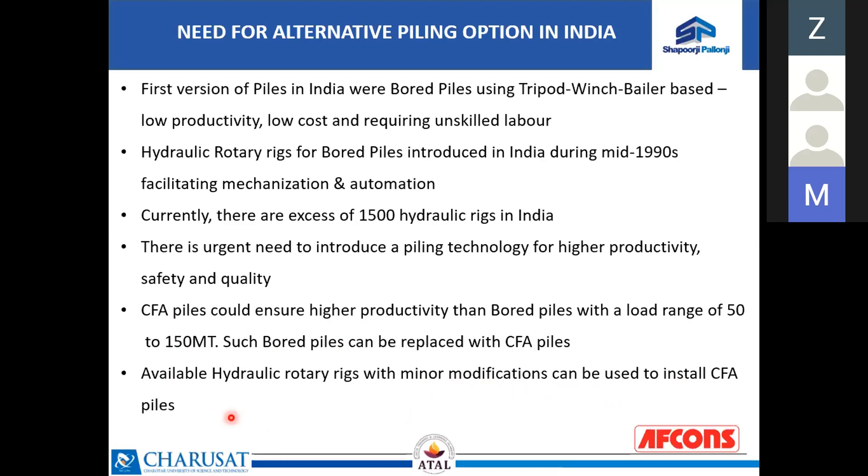That means if the pile is about 20 meters, the continuous auger will be close to 20 meters. The piling will be initiated by a continuous movement of this flight into the ground, and boring will take place. While boring is taking place, all the soil goes inside this spiral auger, which means this soil itself stabilizes the vertical wall of the pile bore.

This means no stability fluid is required. Once you have reached the bottom, you start raising the auger. While you raise it, concrete is being poured inside the hollow portion of the auger, and it comes down at the bottom. While you're retracting the auger, there is a simultaneous pouring of the concrete from the inside tube, and this concrete or grout is replacing the pile bore.

Interesting part is that after the wet concreting is done, you will have to push the total length of the cage into the wet concrete. This is the toughest task and one of the unique features of the CFA pile. That means pile reinforcement is being pushed into the wet concrete. Once the entire reinforcement is pushed, we have a CFA pile ready.

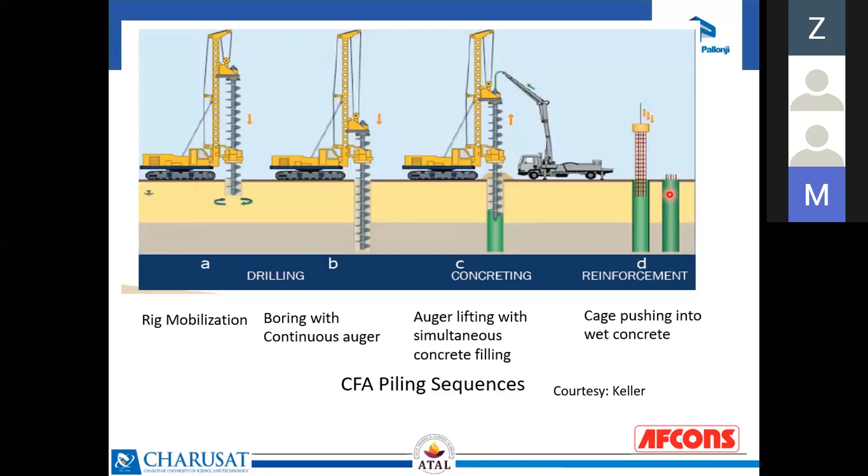What are the benefits? CFA pile installation has lesser number of activities. They require less equipment, less resources. No support fluid is required. Bentonite is known to be environmentally non-friendly, but no kind of stability fluid is required for CFA pile.

There is cost saving because of high progress. They are easier to maintain, and quality is of very high standard. It is possible to install a CFA pile in less than 30 minutes, whereas a bored pile takes close to 1.5 to 5 hours to execute.

What is the present scenario in India on CFA pile? CFA pile is not executed in India so far. There are apprehensions that the cage pushing into the wet concrete can spoil the quality or may not be possible. Concrete logistics is also not still smooth in India, but definitely now things are improving.

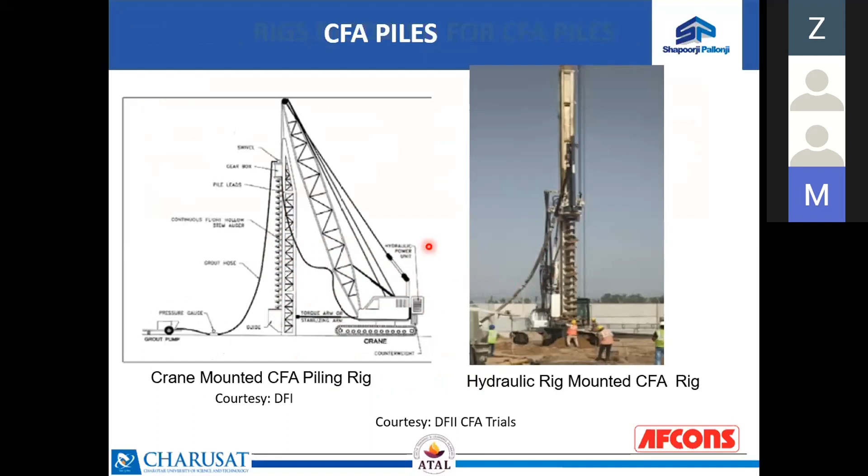No code or standards or guideline exists for CFA pile in India. Therefore, there is a need to standardize such piling practice in India. So these are two typical options - your CFA flight can be either crawler crane mounted or mounted on a hydraulic rig. Both are available in India. Therefore, adaptation of this technology is definitely possible.

Keeping in mind the faster progress requirement in India, DFI of India had commenced a technology trial at Hisar in Haryana state. This was an organization set up with committee members, and I had been privileged enough to head this technology committee for the continuous flight auger pile.

I had a very strong supporting team, which you can definitely see. It came from all walks of life - from infrastructure companies, from consultants, from academia, from owners, from people abroad. And this formed a very strong committee at the site to execute, to prove that CFA piles can be possible in India.

Essentially, this was not an R&D project. In fact, it was a demonstrative project just to demonstrate that such piles can be executed in India. We even called professors from IIT, we called IS committee members to observe and appreciate the possibilities.

So this is a typical location. It was about 210 kilometers from Delhi by road. The site was one of the nuclear power plant construction sites near Fatehabad at Hisar.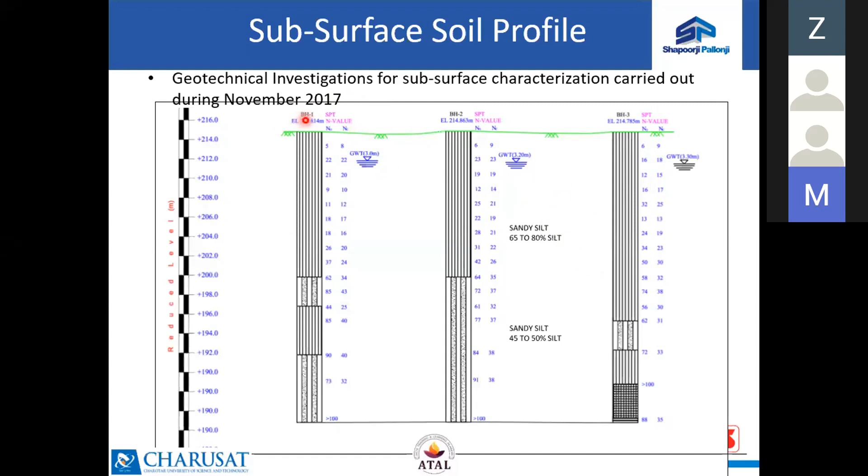We had carried out these operations, commencing in November 2017 with the geotechnical investigations. Our plan was to have 6 trial CFA piles of 600mm diameter and about 11 meters in length. Before these 6 trials, we had 2 pre-trial piles - these are 2 probe piles just to understand, because since we were doing this for the first time, we needed to learn from these 2 trial piles.

Of these 6 piles, 2 were earmarked for vertical load test, 2 for pull-out load test, and 2 for the lateral pile load test. We also did many low-strain dynamic integrity tests, including thermal integrity profiling, which was done for the first time in India. So this is a typical layout of the boreholes and the pile locations.

This is the typical cage we had fabricated. You can see there is a 10 mm spiral, which is stirrups spaced at 150 mm center to center. There were 8 bars of 20 mm diameter, and this pile was 11 meters in length. There were spacer bars spaced at 1 meter center to center, overall meant to impart rigidity to the cage.

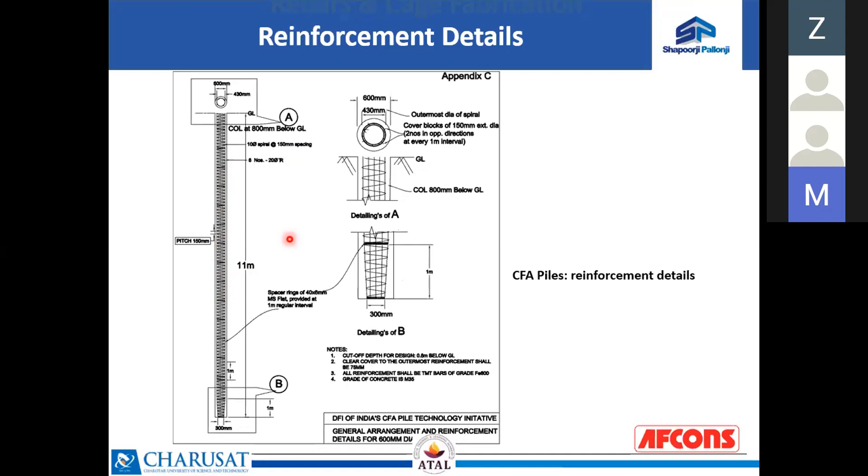Success of the CFA pile depends largely on the rigidity of the cage, because this cage has to be pushed into the wet concrete.

The pile was also instrumented. We had seen that 2 piles were instrumented with heavy duty strain gauges. There were 3 gauge locations: gauge 1 at 1.22 meter, second at 5.79 meter, and third close to the bottom at 10.36 meter. These gave an idea of the load transfer and the quality of the concrete over time. Immediately after the concrete, there was also a thermal profiler, which could give us an idea of the temperature within the cross section of the pile.

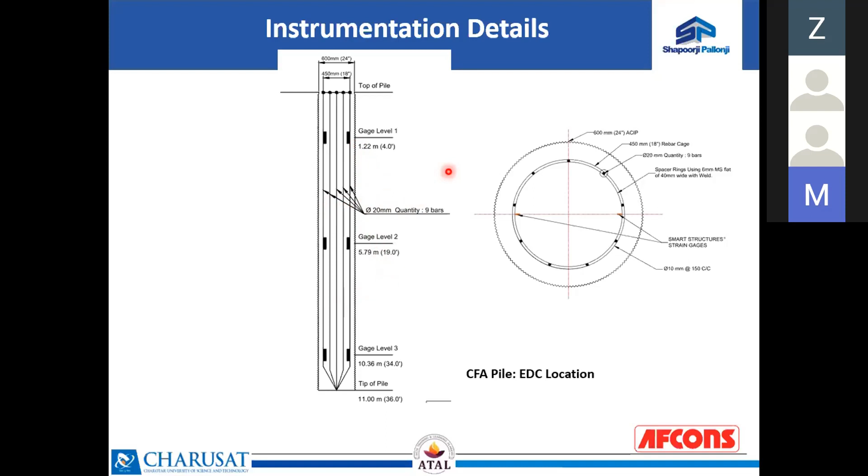So these were the schedule of the piling. We had installed the piles at the end of May. There were 3 days spent to install about 8 piles. Then we conducted the pile load test. The pull-out test was 70 ton, vertical pile load test was 170 tons, and the lateral test load was 12 ton. Load tests were performed during the first and second week of November.

Some of the snapshots of the site. This is the execution work going on for the CFA pile at the site. You can see a continuous flight auger. This is a concrete pump ready. You can see the concrete pipe is slowly connected to the top, and connected to the flight, so that immediate concreting through the inner tube of the auger could be possible. This crane was mobilized to lift up the cage and lower it into the concreted bore.

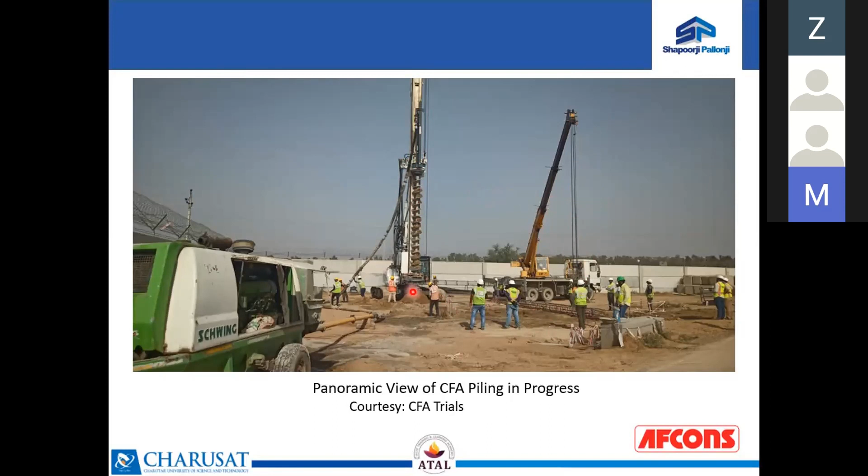Over here, fabrication is in progress. You can see the spacer bar, almost spaced 1 meter center to center. Over there, the main bars are being put up, and the fabrication is taking place. An essential feature was that we did not use binding wire. In fact, all the connections were rigid and welded. So to the cage, you can see the instrumentation being connected.

This is another typical view showing the piling works in progress. You can see requirement of good housekeeping is essential, so we had a JCB that used to clean up and remove the muck immediately.

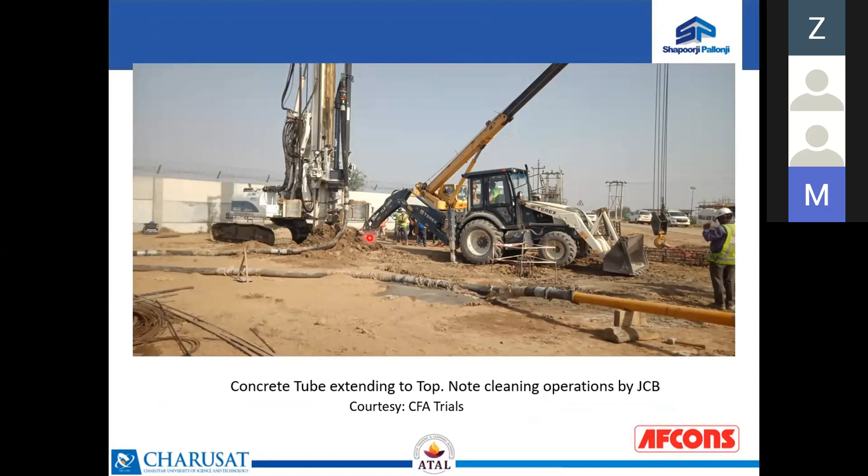This is the concrete you require. You require a very high slump concrete. You can see it's almost a flowing concrete with a slump of as much as about 800 mm. Normally a concrete pile will have a slump of 180 to 200 mm, whereas here you require at least 4 times the slump or flow value.

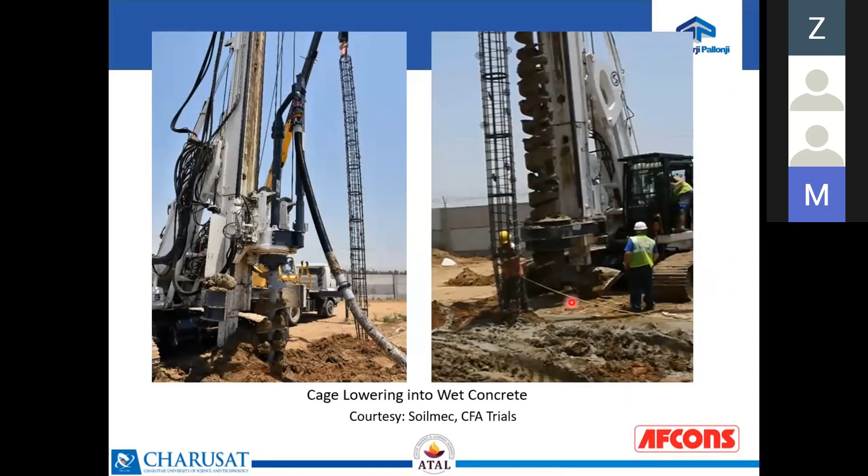Here the cage is being entered into the concrete. This is the cage completely inserted into the wet concrete. This is now the completed pile.

We had performed the load test on the pile also. 2 load tests were performed on piles P2 and P3, subjected to a maximum load of close to 180 metric tons. Even at this highest load, the maximum displacement seen was 12.722 mm. Net displacement was 8.88 mm, meaning a rebound of 3.8 mm was taking place. You can see that the performance of the 2 piles was exact, indicating that workmanship and quality of the CFA piles is uniform, giving a uniform load if workmanship is ensured.

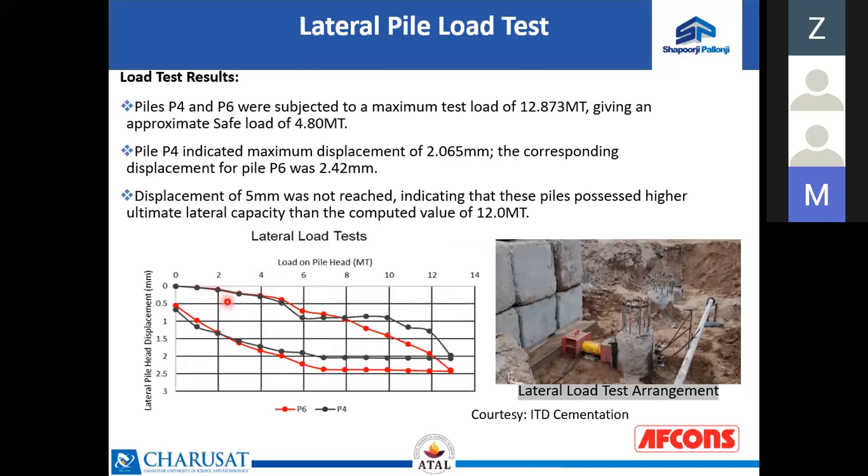This is the lateral load test, performed on piles P4 and P6, subjected to a 12.873 maximum test load. Even on application of this load, the lateral displacement was seen to be 2.42 mm and 2.065 mm. In fact, the required displacement of 5 mm was not reached. You can see almost a similar nature of the curve, indicating consistency in the pile capacity by the CFA method.

We had also performed the pull-out test. Here is how the piles are pulled: the main bars of the piles are welded to the casing, and then the casing is lifted up by a hydraulic jack.

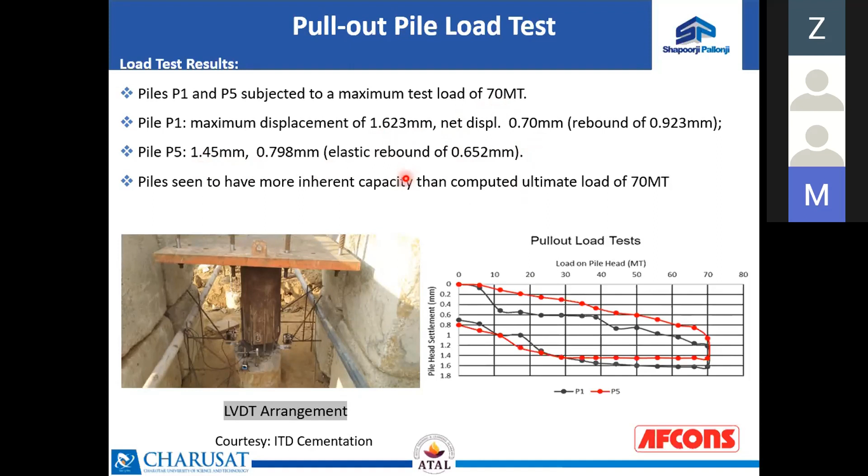This is the load test results we had for the pull-out test. Even at application of 70 tons of load, total displacement was just small, 1.62 mm. Net displacement was 0.7 mm. This speaks of the success of the CFA pile, because all 3 versions of the load test were able to give us the required results.

So what is the accomplishment? The demonstration of this project, which involved execution, design, installation, and testing of the CFA pile, was successfully conducted between November 2017 to November 2019, that is 2 years. Testing of CFA piles was conducted in November 2019, and all the tests revealed that ultimate capacities were 15 to 20% higher than the estimated capacities, which meant there is a possibility of upward revision of the design input parameters.

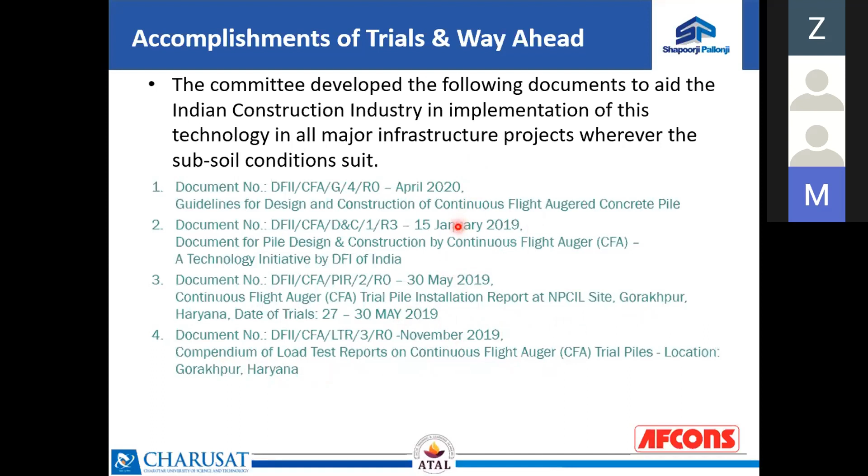Our piling committee are keen to have the following documents developed and shared with the Indian construction industry so that this technology is well understood by one and all. These documents are available on request. They include the design and execution document, the planning methodologies, the exact experiences of the load test, the trials of pile installation conducted at site, and the compendium of all load tests carried out at the site. We even have a draft code in the series of 2911, and we are trying to pursue the codal panel, the 2911 BIS code committee, to make sure CFA piles also come under the purview of the Indian code. This committee shall put up continuous effort to facilitate implementation of CFA piling technology in future projects.

To conclude my presentation, I tried to present the various types of piles common in India, along with case studies, particularly the developments in Gujarat. Since the 1990s, there have been entries of piling technology in India, and some of these were stated in this presentation. The piling case studies of Gujarat were presented, including the spun piles at Dahej, the driven cast-in-situ piles at Mundra, and the case study of the Sabarmati Riverfront project, conveying how diaphragm walls and retaining walls can be used for infrastructural and recreational sectors of India.

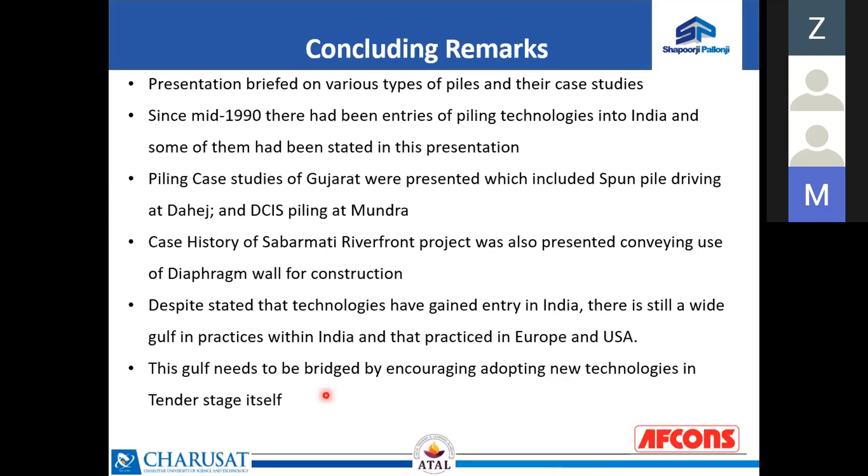Despite the technology having gained entry in India, there is still a wide gulf between practice in India and what is practiced in Europe and USA. This gulf needs to be bridged by encouraging and adopting new technologies at the tender stage itself. The owners, particularly those actually executing the projects, should make it mandatory to use such technologies during tender time itself. This will encourage more engineering firms to roll out their technologies and usher in growth of the nation and forward thinking.

DFI, to which I play an active role, is attempting to demonstrate this CFA technology pile elsewhere also, apart from Haryana where it has already been done. We are trying to get in touch with L&T to execute this kind of piling project at a Barmer refinery in Rajasthan. So there are fresh technologies knocking on the doors of India. As an infrastructural player, we need several choices of technology so that situation-based solutions can be adopted. Therefore, fresh deep foundation technologies need to be encouraged in India through governments, major owners, consultants, and academicians.

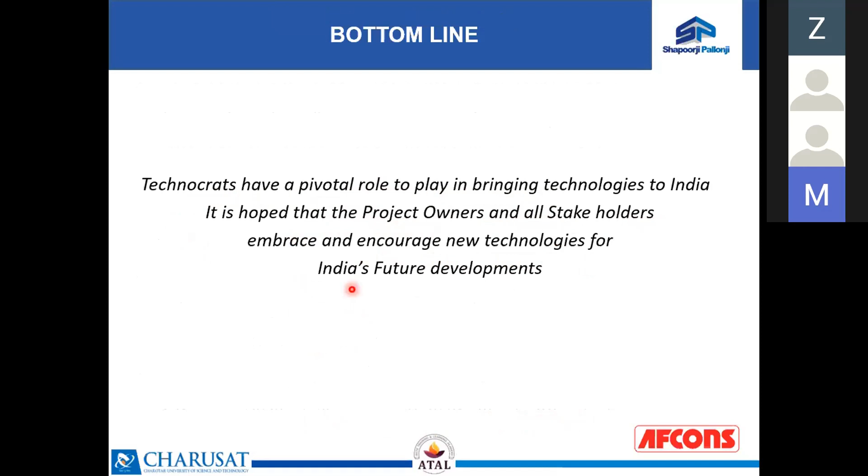Technocrats like you, academicians like you, have an important and pivotal role to play. That means even you as faculty can bring technologies to India, and it is hoped that project owners and all stakeholders will embrace and encourage new technologies for India's future development.